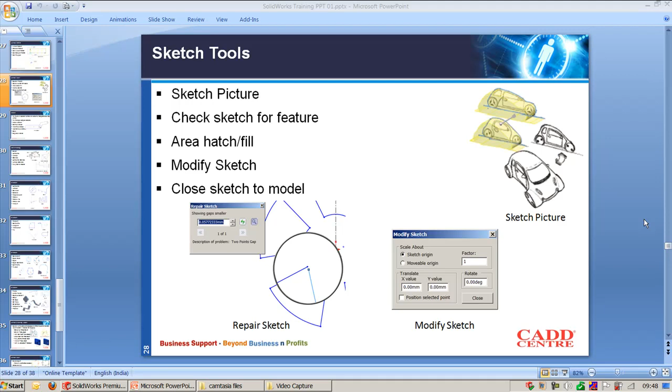Close sketch to model is useful in SolidWorks to close the open loop without drawing the sketch. Let's see how we can do this in SolidWorks.

This is the drawn profile, and now I need to evaluate if this profile can be used to create an extrude. As you look into this sketch, we know that it is exactly completed and there is no error or mistake in this profile. But let's see whether the software detects any mistake when we try to create the extrude.

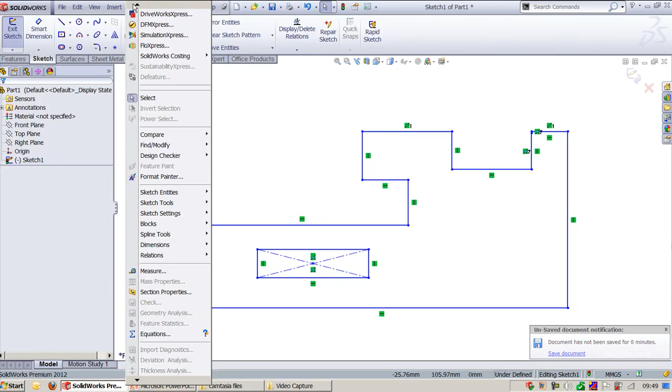I'll go to sketch tools. Here I have check sketch for feature, and I'll select base extrude. If I use check, it will give a warning message. I'll click OK, then give the gap as 2 mm and use this magnifying glass, and it will show you the area where there is a small gap. That is, any gap smaller than the 2 mm we gave will be shown there. And if there are a number of problems, it will show 1 of 1, 1 of 5, 1 of 6.

So you can understand how many issues you have. Everything will be shown using this repair sketch, that is check sketch for feature.

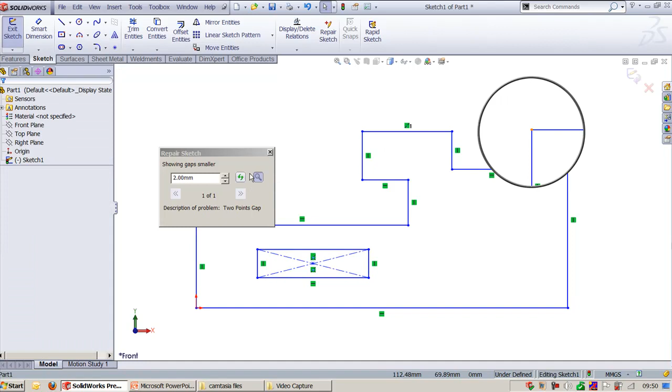Now, with this command active, I can drag and close this gap. Once again, go to sketch tools, check sketch for feature, select base extrude and check. Now it says the sketch contains 2 closed contours and 0 open contours, so this is suitable for creating the extrude.

This is one case. Next we have one more challenge. I've drawn the sketch in horizontal orientation, but I need this whole sketch to be rotated to some degree, say 45 degrees, or I need the same sketch scaled to a ratio of 0.75.

Go to tools, sketch tools. Here we have modify, and using this modify sketch you can modify the existing sketch or the imported sketch as a whole. In the degree field I will make it 45 degrees.

You can see the sketch is rotated, but the rotation is done in a default orientation. I mean it takes some origin and rotates about its axis, but I need a specific origin. How can we do this?

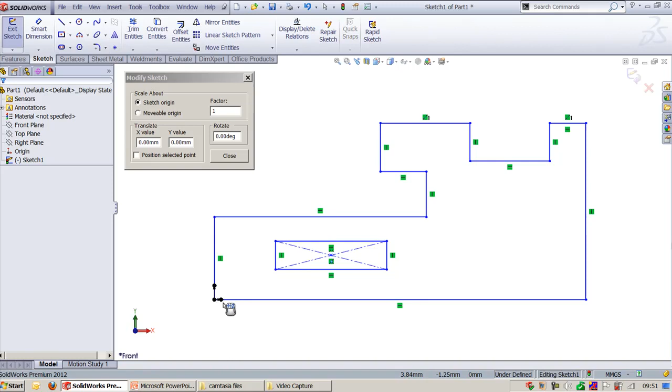Go to tools, sketch tools, modify. You drag this and position it where you want to keep it, and now you can use the right button to say which direction you want to rotate. You can use this to rotate, or you can enter the angle you require, or scale it as needed.

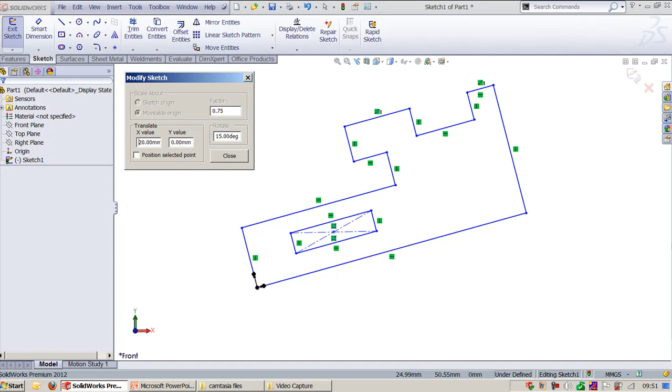And if you want to move the origin, you can do this using X value and Y value. Make the X value 20, and you can see it is moved in the X direction. This gives the absolute distance traveled from the origin point you had given. Close this, and this is how we can modify the sketch as per our requirement.

Now let's see how we can apply area hatch or fill for the required closed loop. Go to tools, and there you have area, hatch and fill: hatch, solid, and none. I'll use hatch, and if you select this area, if it's a closed loop, the area will be hatched. I'll click OK here.

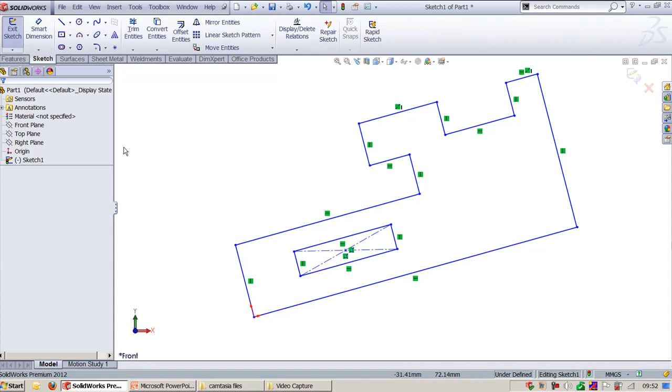Now I will go back to the initial condition and continue. Go to tools, area hatch fill, select this area, and say it has to be scaled. If I give 2 here, you can see it looks dense. If I make it 5, it is still densely populated. I'll make it 0.5 for wide spacing between the lines.

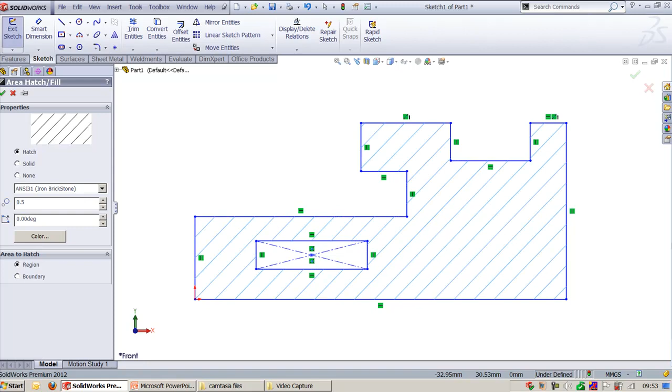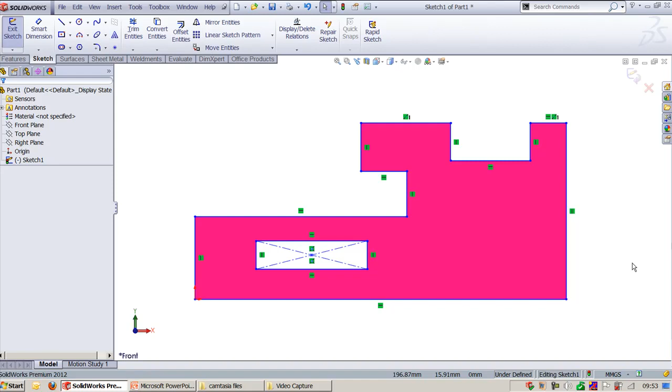I can also use solid fill and set the color to magenta, then click OK. You can see the hatching is done using solid fill. This is not used in many locations, but if any sectional or important area needs to be highlighted in the sketcher model itself, you can use this area hatch.

Moreover, SolidWorks gives you an environment where the sketcher environment can also be used as a 2D drafting environment, and you can use most of the tools available in the 2D package.

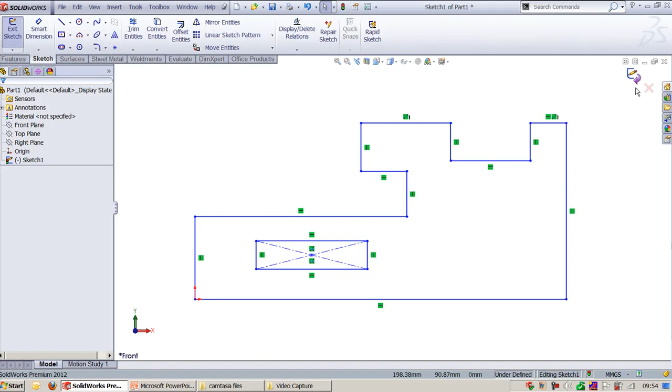The next topic we need to see is close sketch to model. Let's see how we can do this. I'll click OK here, and using this I will add the material, and once I complete it, let's see how we can do this later.

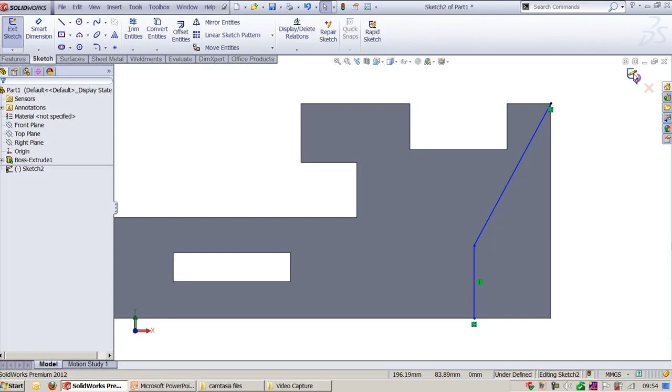I'll drag this and create a sketch on this face, and I'll create a profile like this. But here I'm not going to draw this line to complete and make this sketch a closed loop. I'll leave it as is, open, and click the confirmation corner.

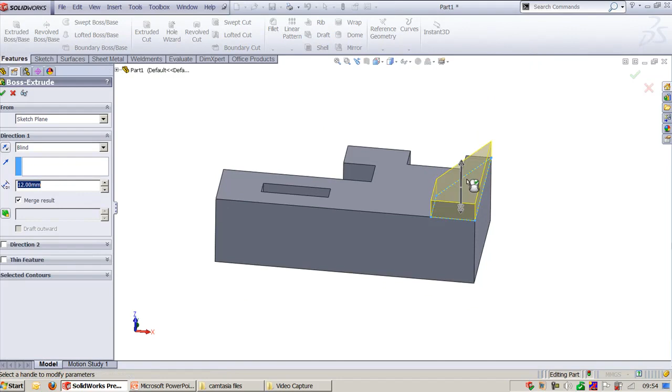Now if we use the extrude command, you can see it asks you an option: close sketch with model edges. You can reverse the direction you want to create the feature and click yes here, and it will give you an option of creating the sketch with close sketch.

This is with the execution of the command. Without executing the command, you can also do this. Let's see how.

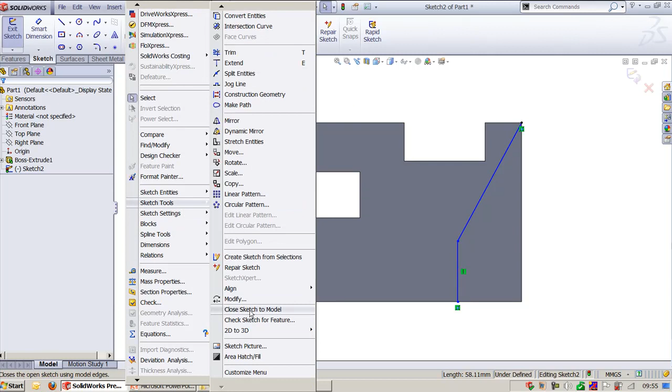Now I'll go to the same sketch, and here I'll go to tools, sketch tools. Here you can go for close sketch to model, and you need to define the direction you need. I'll make it yes here and click OK. Now you can see, in the other direction, the sketch has been created as a closed loop.

Go to extrude command, and if required apply draft and increase this, then click OK here. This is how you can use close sketch to model when you create the feature.

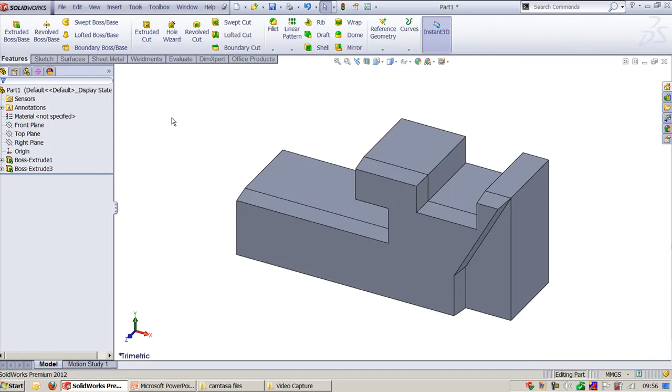So this avoids the major task required to create the entire closed profile, and the software itself gives you an idea and an intelligent tool to close the entire open loop.